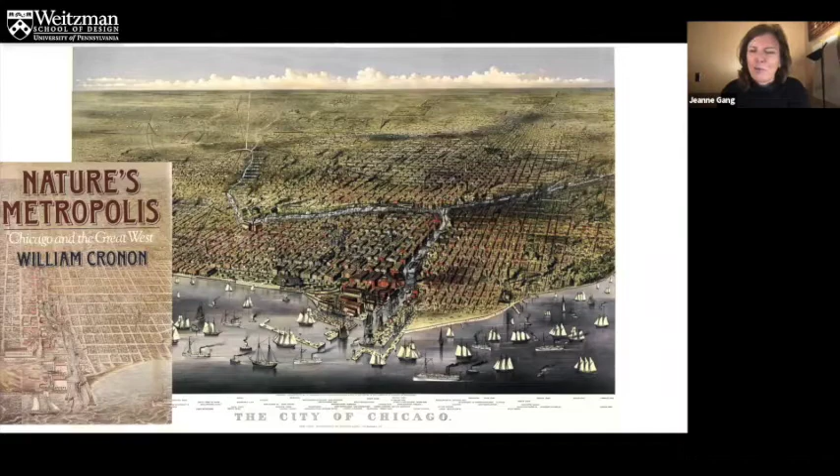When I look back, one of the most important books that I've ever read about cities in general, and it happened to be about my city, was Nature's Metropolis by William Cronon, because in this book he really talks about the environmental perspective on the history of 19th century America, and this story of the city and country that become more and more entwined and bound together in a system that reshapes the entire American landscape and the culture that we pretty much know today. So I highly recommend it. It's really one of the best books I've read on the city.

But the human dimension to this background of the work is that when I first started out as an architect, I happened to start with a number of projects that were all community centers in various neighborhoods in Chicago. These commissions were rather small, but I really got to know a lot of the people in these different neighborhoods. This is one in Chicago's Chinatown. The second one here is in the neighborhood of Auburn Gresham, on the south side of Chicago, and it's also a community center for foster kids.

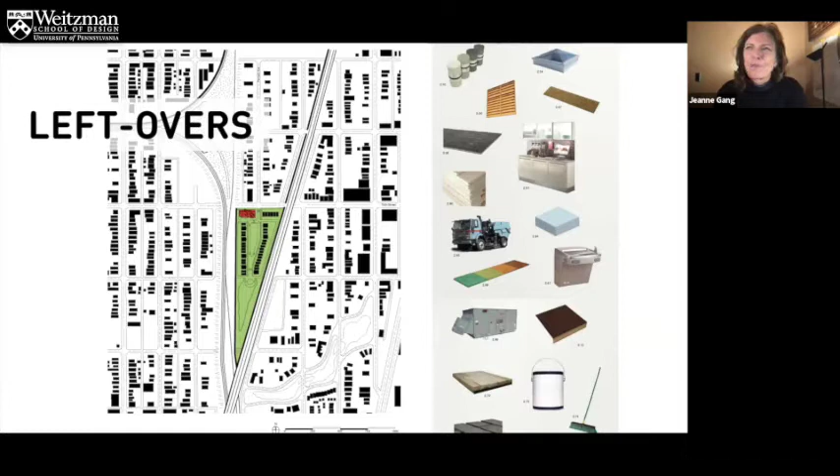And it's really where I learned my tactics, which is having a very small budget, which many young architects do, and trying to make use of things that were left over or donated. In this case, we had a piece of leftover land, that green triangle. The red rectangle is the building. But we were also told we need to gather donated materials and services even to create the building. And so working like that and using those constraints as inspiration, we created a community center with the leftover concrete that was literally donated from some of the big high rises going on in downtown Chicago, which were different mixes.

And so this idea emerged to create a building that was expressing the donations, highlighting the differences of the different mixes of concrete, and showing at the same time their fluid form, because the concrete, of course, is a fluid material. And so these inspired what we call the strata wall, which was the front of the building.

So one more community center that around the same time was on the far south side of Chicago, which is an environmental center focused on conservation of environment and also green job training. And this project ended up being a very influential project for our following work that came afterwards. But it really was based on the place and the qualities of the place.

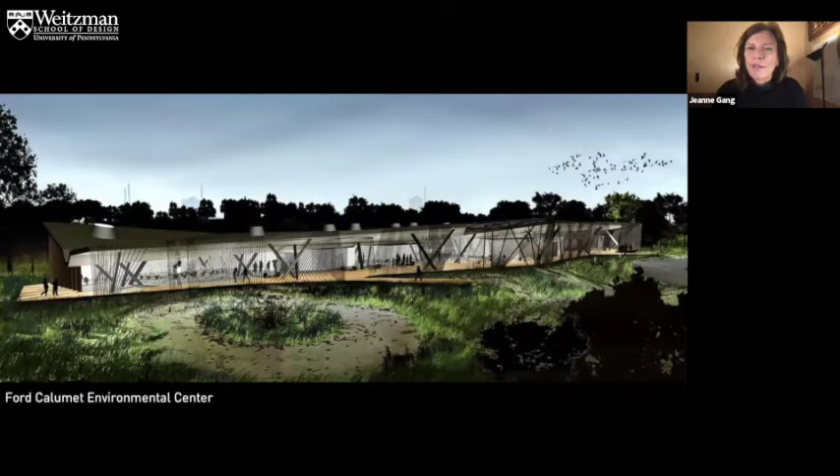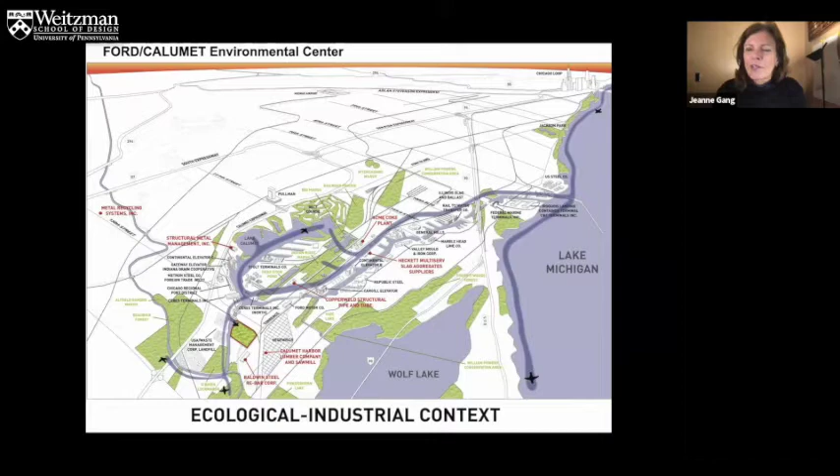So if you see in this diagram here, the red triangle in the lower left-hand part of the slide is the site. And you see this kind of patchwork of industrial areas and ecological areas, and then overlaid with this migratory flight path. And so all of these components that are both ecological, but also material opportunities came together to create a project that was really focused on reuse.

And so in our teams, we did an inventory of all the materials that were available, and came up with not just a form, but really a strategy, a process by which we could build a building made out of reused materials that were available and nearby. So the metaphor for this for us was a nest, not a nest to look like a nest, but a nest in terms of using what is available, what is nearby, and using the least amount of energy possible to create another community center.

So this first model of a diagram showing the uses of these different materials that were available in the area, and at the same time a discovery, which really is why I love architecture so much, is in the research mode, finding out that this migratory bird path is coming right through Chicago. Like 2 times a year, you have this incredible international migration of birds, it's an event that's visible to everyone.

And you can see this happening, but there's a big danger to it as well. Something like 1 billion birds every year die crashing into clear window glass that they cannot see. And so this is really decimating bird population and biodiversity. And it was something that we discovered through our research phase. We ended up working with an ornithologist to help us design a way to prevent that, especially, you know, we didn't want to kill birds that people are coming to see on this ecological project.

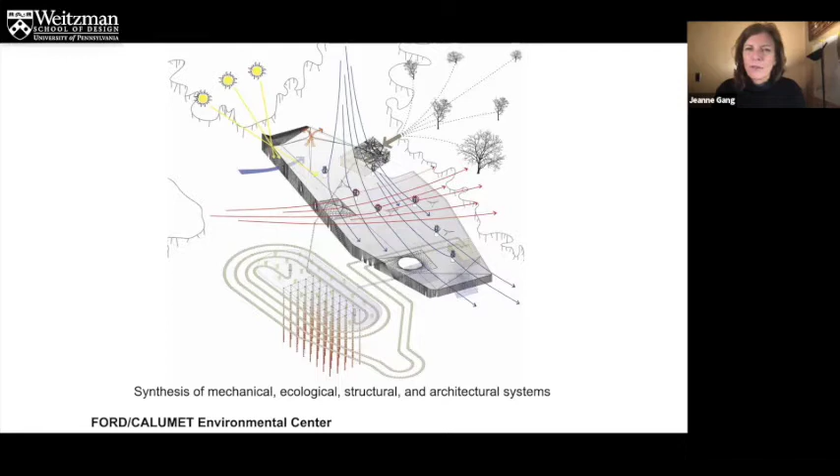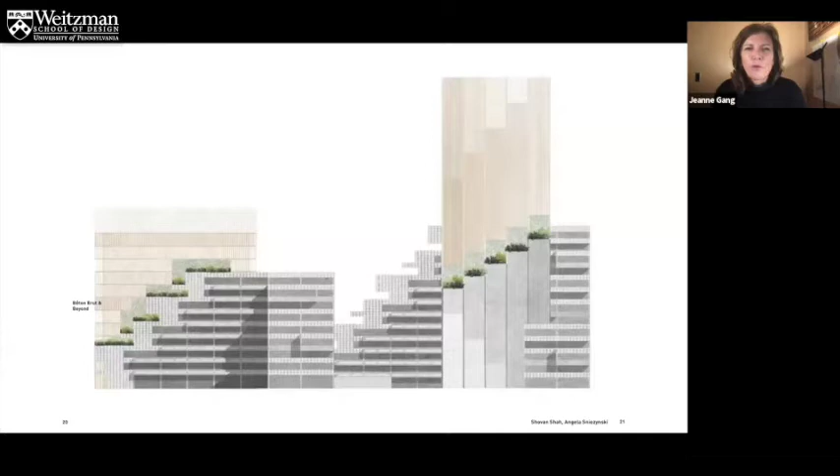Last spring, we did a project on this, the Daumier project in Paris, which was a former social housing, and students did things like adding on to it with wood structures, or reimagining the uses that could inhabit it and editing out parts of the building to make it last longer, to keep that embodied carbon within the building. Especially a concrete building, it would be a big waste to tear down. And anyway, this is the research that is going on for that type of building.

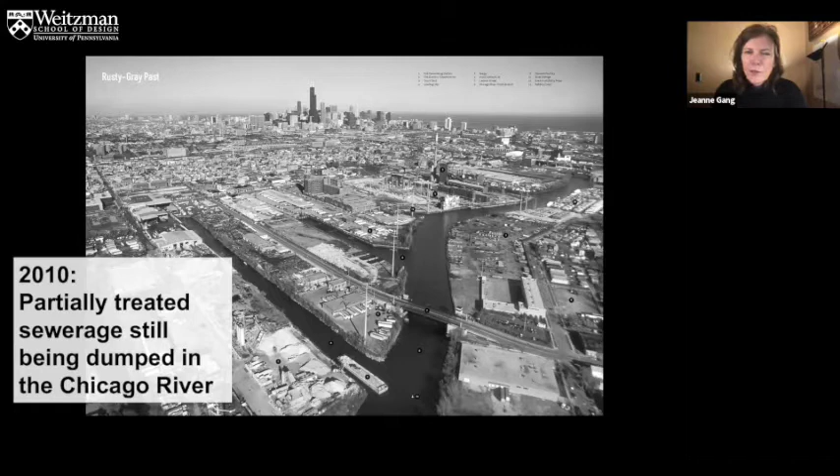So in 2010, it was still the case that partially treated sewage water, CSO, combined sewer overflow, was being dumped into the Chicago River. This view shows the south branch of the Chicago River with this incredible vacancy where industry had once dominated the edges. So very interesting in Chicago: a lot of people don't even know where the river is because there's no access to the river's edge because of all this industry, even though they oftentimes pass over it on their way to work, maybe two or three times in one day.

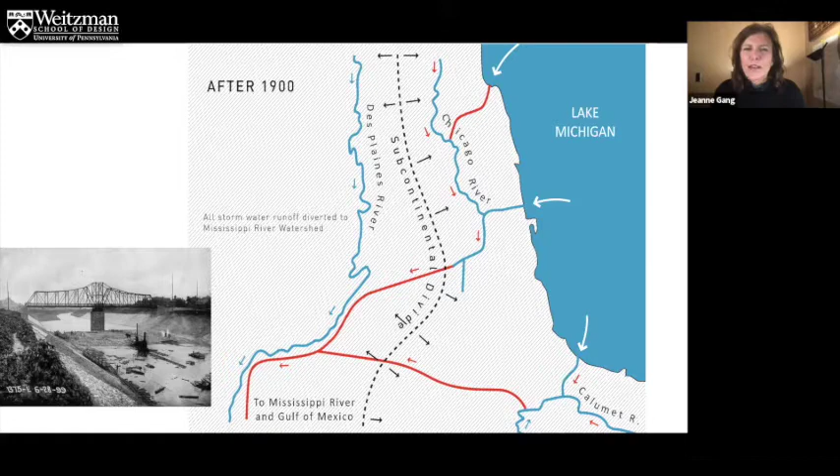What actually happened is that the Chicago River was reversed. These red lines on the diagram were canals built to take the flow, instead of going into the lake, which is the city's drinking water, and pull it away from the lake to save the drinking water. It was a massive infrastructural project. Hard to imagine getting something like that done today. It was great for the city of Chicago, but it wasn't so great for everyone else downstream where this polluted water was heading. And over time, the results were very negative on the environment, like flooded basements and bad water quality, as well as invasive species having an opportunity to get into the Great Lakes. But the opportunity of the vacated industry was a great one.

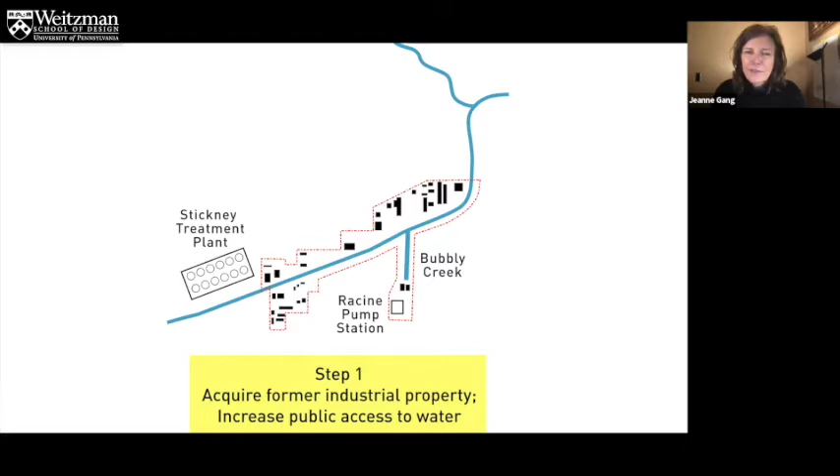So in our book, we made these recommendations, of course with the advice of science and experts, to visualize step by step what we might do to unreverse the river, to put it back into its original form and protect the drinking water, but also reduce energy use on infrastructure. But the number one step that we recommended was for the city to acquire this riverside property, and also to give people access to this water's edge, which they didn't have before.

And so after doing this project, which was just a book project, a new political administration came in and the mayor decided to really focus on the river. And this book had an impact. It really helped shift the idea of what the river is in Chicago to something that would give people access to it. Even if the river had bad water quality, the idea is to create stewards out of the public that then care about it and take that fight forward.

And then we ended up ourselves, and also a couple other architects, building boathouses for Chicago youth and communities to be access points to the Chicago River. So in terms of reuse, it's thinking about the city's use as an industrial mecca and transforming it into something that is more about public access. Many of these sites are quite polluted, and we must remediate and then build upon them. But what amazing results, in that now there are so many youth-oriented crews and different groups that are able to get on the water, and a whole cadre of people devoted to protecting it.

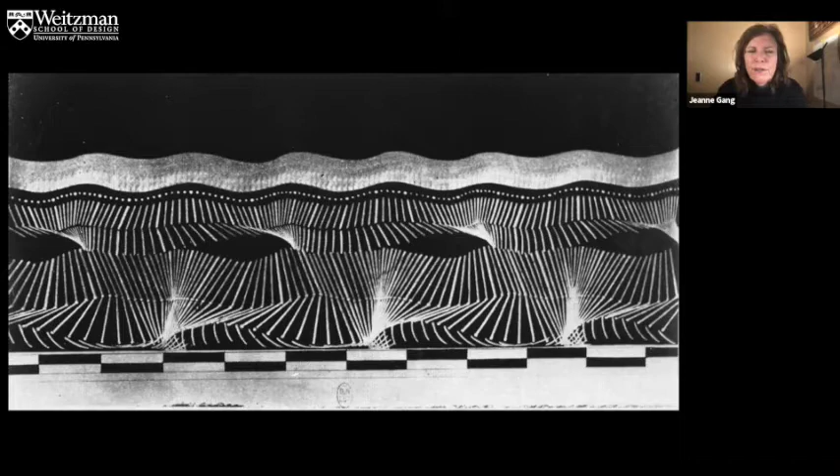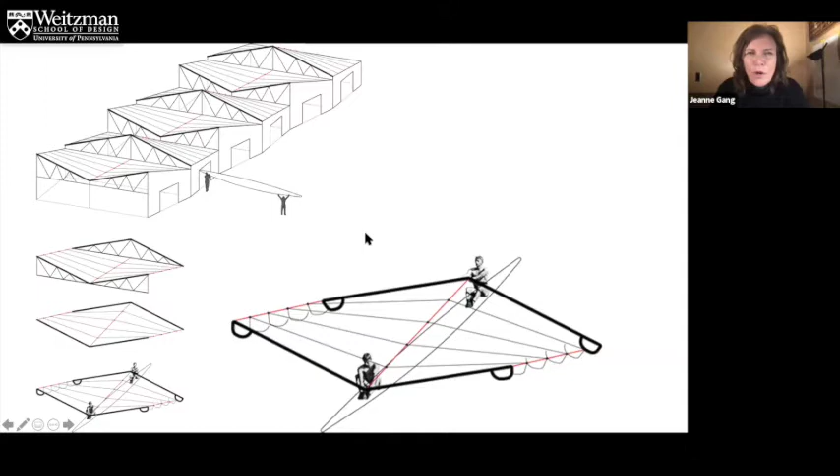the motion of rowing, how to capture motion into the building. So we looked a lot at these Muybridge stop-motion photographs and looked at the motion of the oars to kind of extract that into a roof form that would be dynamic and varied, just like the oars' motion, but also do something environmentally positive, like create clerestories that help warm the boathouse without using fossil fuels.

So that's how that looks, using the M and the kind of V-shaped oar positions. We created this almost like a warping roof and a field house. I think it was required to be masonry, but we were able to convince the city to use slate, which is masonry, kind of. And then really simple materials like plywood that's bendable. So again, it's this coming together of the materiality that exhibits its properties, the qualities of bendability.

And even in this one, you can see we had a very low cost plywood, and we ended up just with our team gold leafing these little knot holes that are in the plywood just to give it some special spark, because that knot hole is actually where the branch was coming out of the tree, so it's kind of like a special moment.

They do a lot of classes here, like these are disabled veterans that are learning to row, but it really is an incredible program to build community and resilience and teamwork for the youth in the city. There's a great film that just came out. I'm going to forget the name right now. I think I'll tell you at the end, but that talks about some ex-gang members who got into rowing, and some of the shots are filmed in the boathouses, but it's a great film just telling the story of what it did for them.

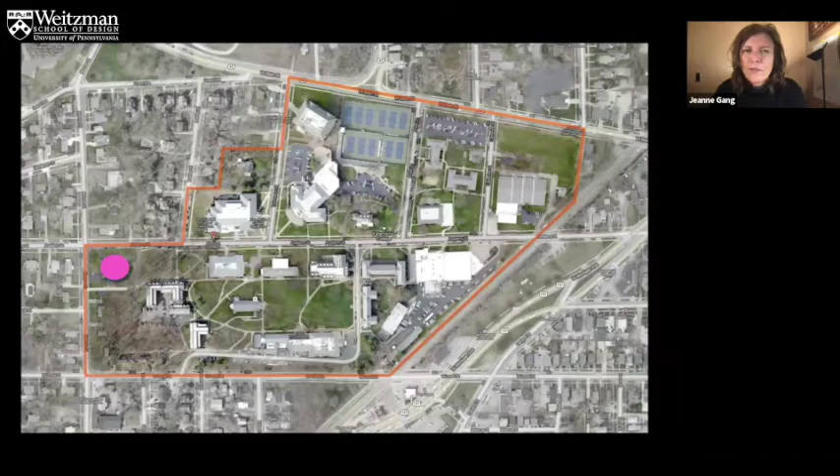So this is just a small building on the Kalamazoo campus in Kalamazoo, Michigan. And it's a center for kids to learn how to connect and be social justice leaders. And so the campus is very traditional in terms of its architecture, but this is a very untraditional and very radical new program; they wanted to express the desires of the program, but make a place that would be easy for people to meet and to connect, especially about difficult issues like social justice.

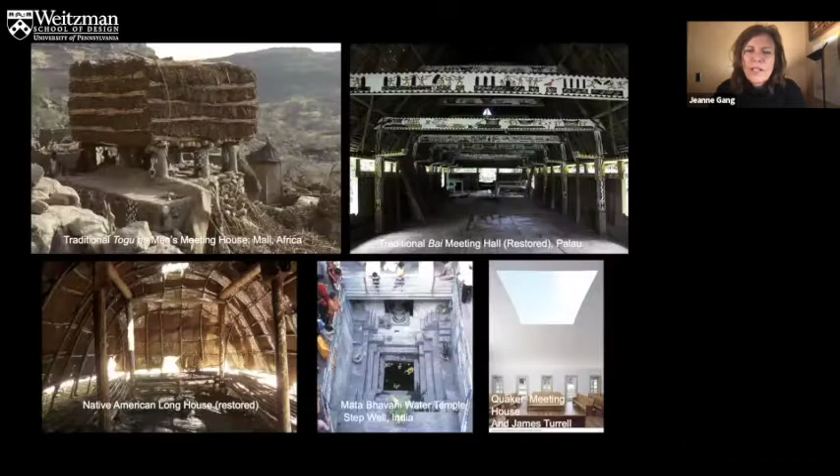It could be LGBTQ issues, it could be human rights issues, and it needed a safe place that allows people to let down their guard and talk straightforwardly to each other. There was really no precedent for this, so we really looked at community meeting houses and vernacular architecture, from Quaker meeting houses to Bai meeting houses. Just what did they have in common? This is really about facing other people in a space.

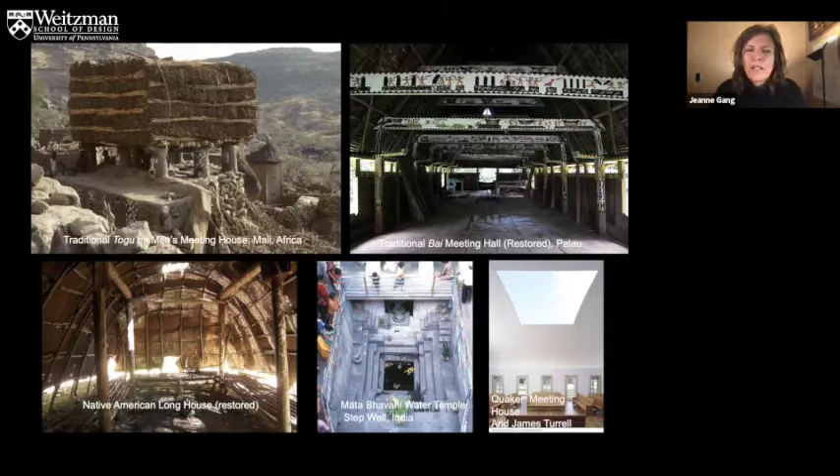The elements, water, fire, light are common. And those are the things that we tried to pick up on to create a kind of central space around a fireplace, which was not exactly easy to do in an academic building, but also food preparation was important to them. And those are all things that help people to come together. So it's really an academic building, but really for special projects, for faculty, for seminars like this room here, and lectures and conferences is one of the big things that they do.

And so we worked with this parti to connect the different parts of the campus, this grove, and then the residential neighborhood nearby, realizing that, to reduce carbon and to produce a very insulated building, we need a lot of wall.

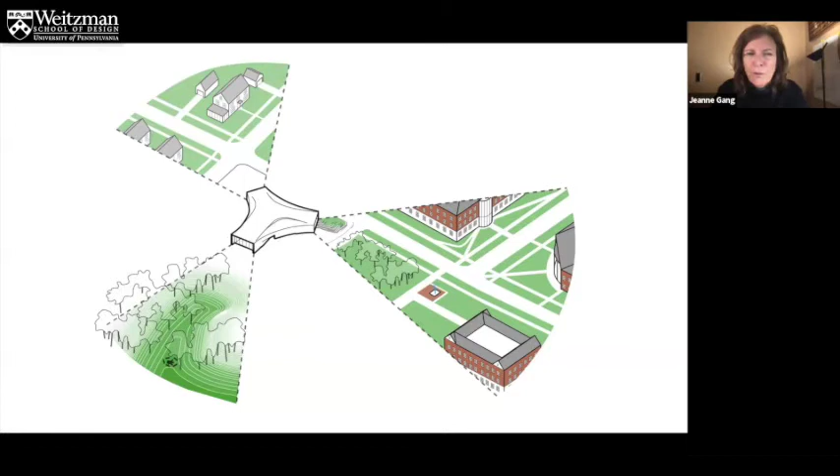And so we focused the window openings on these 3 points, and really focused in on a renewable material, which is the white cedar in the range in Michigan. And I think it was one of the trips up to Michigan where we stumbled upon this barn, which had this curious wall, and it was made out of wood, and wood stacked but on end. So this project really became like a quest to figure out how to do a wall like that in the 21st century.

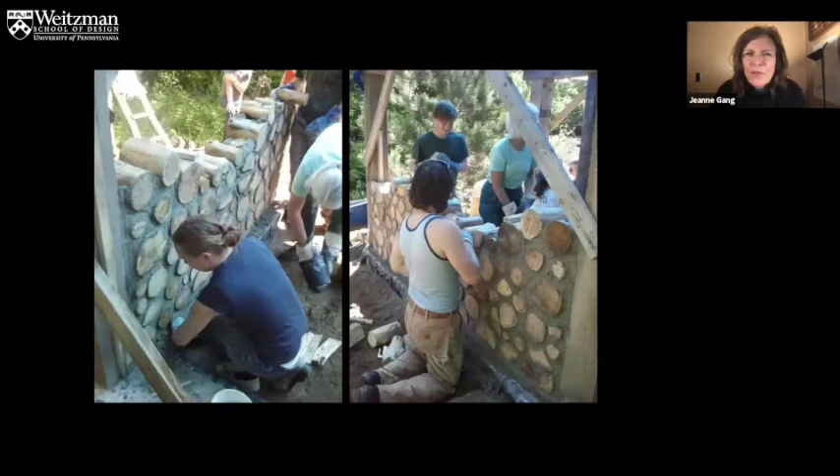And we found a couple of people, like this couple that were very into building like this. They had only built saunas and small projects. So we brought them to do a workshop with us. That's us and our contractors who are professional masons. And it really was a very easy wall to do.

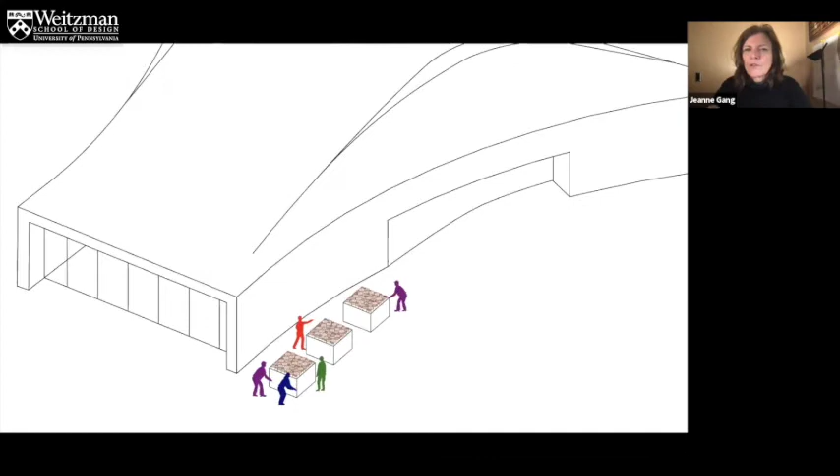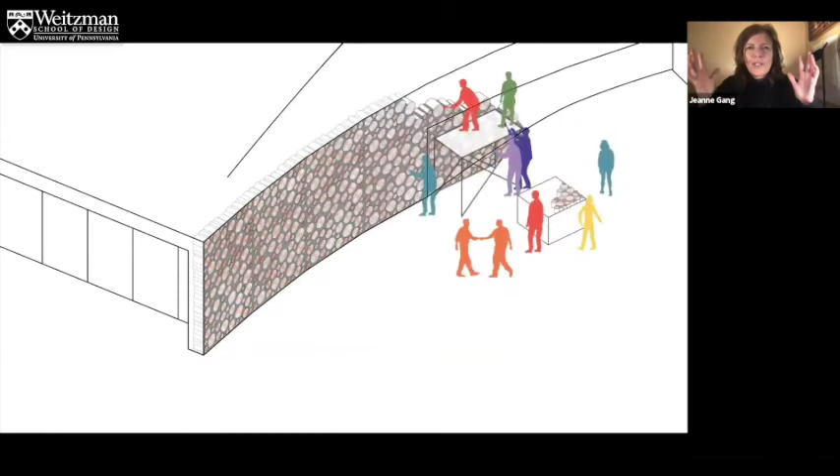But the thing about the use of the material is that, like I said before, it's very little manipulation of this material. So therefore, it's very low carbon, and trees are carbon. In fact, they are carbon. They take it out of the air and they produce wood. So this is a way to sequester that carbon from the atmosphere. So I think very big potential here, and producing aesthetically a beautiful wall that was not exactly easy to make look this refined, because it's a very brutal kind of rough technique.

But I was so happy with the way that it comes out, and it really weathers differently on the different exposures. And it's a long-lasting, beautiful technique to do. Each log is almost like someone's face, with their rings and their wrinkles. I felt like it really connected with the mission, and also was relevant in terms of environment. Here's the one wall that is the northern wall getting the most exposure, and one of the windows where we did an experiment with the eyebrow window there.

This project wasn't finished when we did the book, so I just wanted to highlight it because it's so interesting. It's a reuse of an old coal burning power plant here on the shores of the Rock River. And what's interesting here is you have up in the background a very old college called Beloit College in southern Wisconsin. And this is the power plant that served the town, the industrial town, and heated the college for years and years. And this power plant grew over the years, and it kept adding on and building capacity. And here you can see it with its smokestacks, and this is the 1930s addition to it.

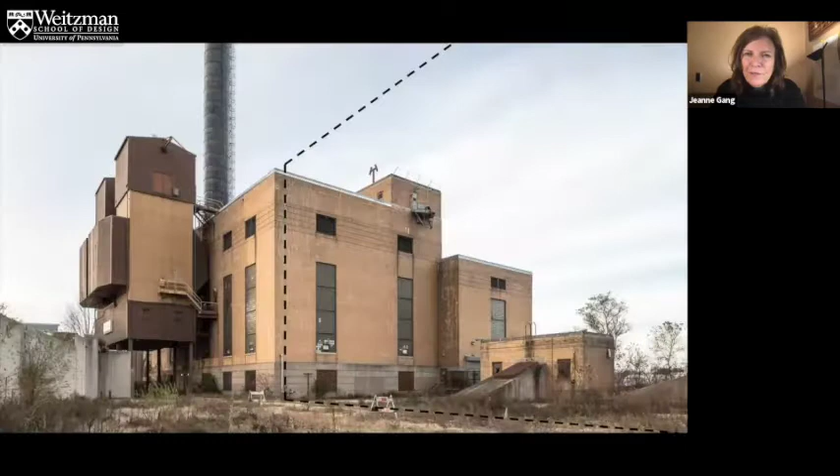This is what it looked like the first time that I toured it, which was about, I want to say, 10 below zero temperature. It was colder inside the building than outside the building. These are the scrubbers that were added in the 1970s to improve the air coming out of the top of the smokestack. But it's just a huge building.

We really researched the construction of it. And it turned out it was built a little bit at a time, many different additions. And so to meet the program of the college, we kept in the logic of that and added a field house, which is one of the functions that they needed, kind of in the same extension line as what the original building was doing, and then connected it with this pedestrian bridge because the college is up on the hill and it's a very busy road down below.

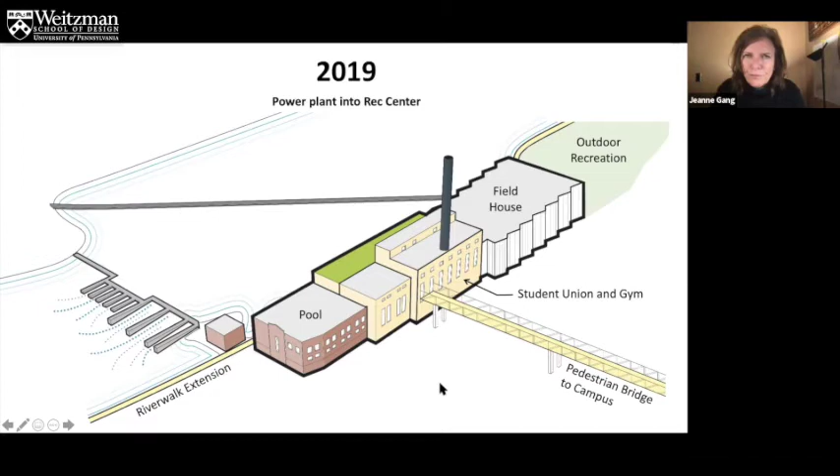And so what was really interesting about their idea is, maybe we could fit it as a college. Most of the time colleges go through this thing where they have to build a new student center, and then they have to build a health center, and then they have to build a recreation center. But if we could get all three of them into one building, it might be able to happen all at once and be more affordable. So that's what we did.

We put all three programs into this building, and you can see we kind of united those with the running track. So this is a student recreation center and health center and a student union or student center. And this big space here is where a lot of the teams practice inside, like baseball and field hockey and lacrosse.

There's also student recreation available, weightlifting, exercise classes in this running track, a pool for the swim team, and then a lot of the other functions going on the ground floor, and the kind of event spaces up at the top. And here's the bridge connecting over to the campus.

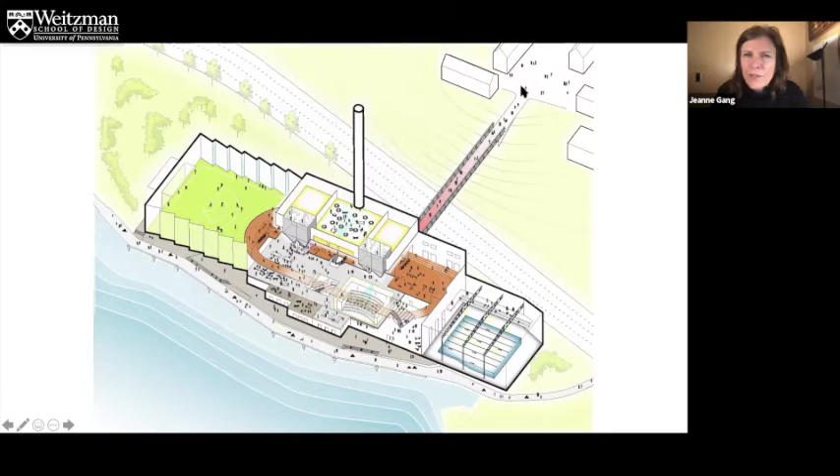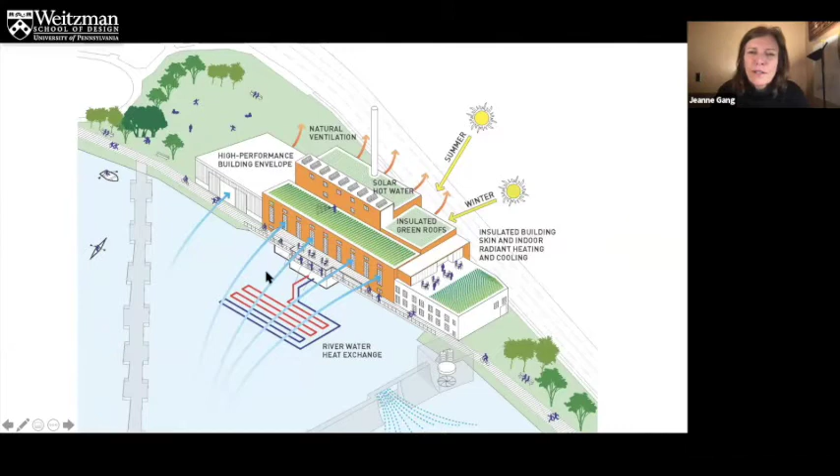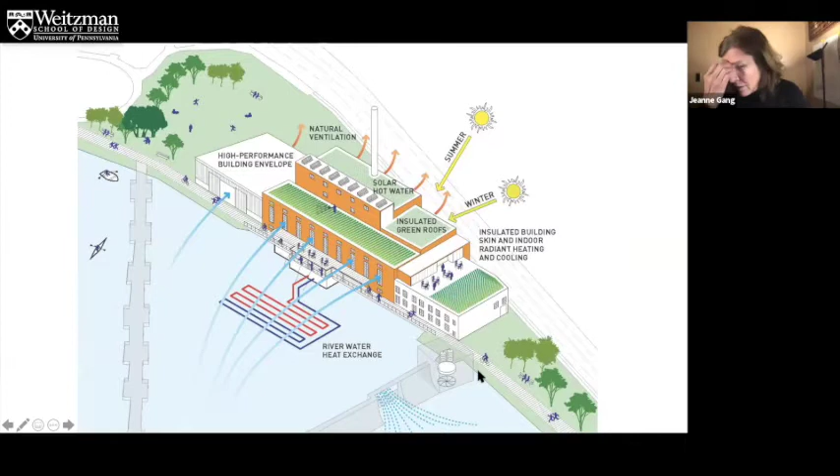And so it was really an interesting project in that you had this conflict between going for the best environmental solution and the historic building preservation. So there was always this battle between those two, and I could go on about that for a long time, but I won't. But we are using the river water for heat exchange and really utilizing the building overall. But we did go for the historic building credits to make this project happen. It looks something like this on the inside.

This is the turbine hall. These are coal hoppers where all the coal is coming down. I mean, it was in pretty bad shape in some parts. So a lot of things to discover in a building like this.

This is the final building, which just opened in the fall of 2020. So it was able to be used this last fall, and it came in really handy in terms of the pandemic, because it's the one building the college had where people could really spread out. And there's something about the scale of it that you just would not be able to repeat today. But this is the building from the Rock River view, in its final condition.

And I just have a couple other shots. I haven't really been able to organize these. I just recently got the photography, but it's interesting. The part which is the field house has so much fresh air exchange, it's really considered an outdoor space that's protected. So they're able to fully utilize that during the pandemic.

Here's the bridge going across to connect. And really the building is acting almost like a piece of infrastructure that connects people from the river, the river walk on the opposite side, through elevators. It's a machine that allows accessibility in the town. This is going across the bridge and inside the turbine hall and the running track held by the structure above. And these are some of the things that were kept.

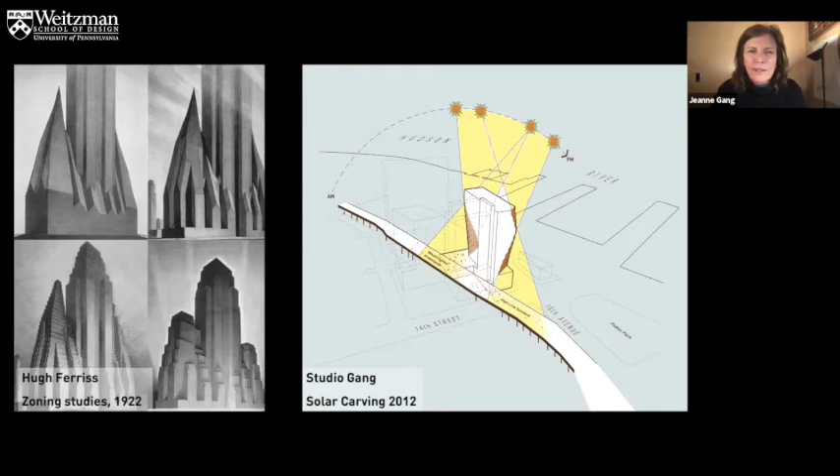But here we found that along the High Line, there's actually an interior block public space. It's not the streets; in this particular site, what you want to protect is this brand new, very popular public park. And so we argued with zoning to allow us to set back off the High Line, preserving light and views, and go higher against 10th Avenue, which is a very busy street, and it's right on the river.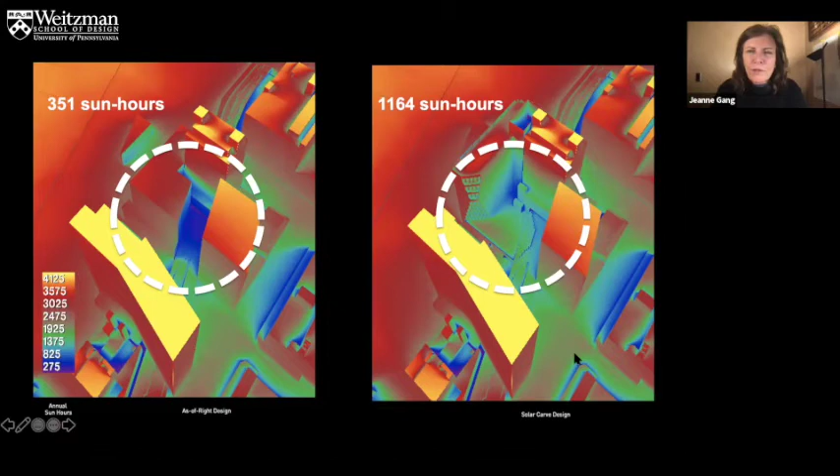And so by doing that, you can see this comparison that we did with our engineers, that with the as-of-right, we would have killed the High Line in this area, the dark blue, but instead with this process of carving for sun, we were able to preserve that daylight. These are some of the study models, how to treat the carved areas. And then figuring out how to produce that in an economical way, like a unitized system.

You can see here. But it really does work. When you're walking along the High Line, you do still get the views and the building. It's kind of being a good neighbor, getting out of the way in a certain way, but even using those constraints, it produced something really interesting and I think very beautiful. It's polite. It's a polite building.

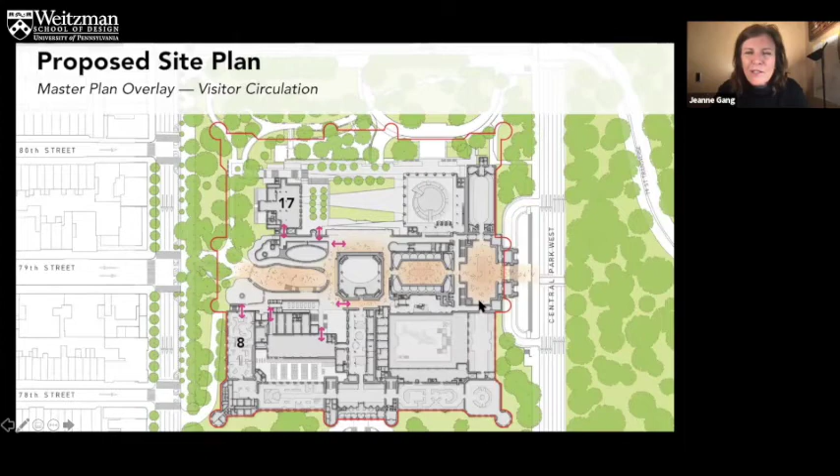And I think it will really clarify the circulation, but the feel of the building, we wanted to express a kind of excitement and sense of discovery, because science education in the United States is very bad. I think we're like 16th in the world or something like that. And it's important to get people excited about truth and science and facts. And so this project is really to encourage people to feel like they want to explore.

So it's really inspired by landscapes that do that, and really studying landscape and how it is shaped. It's very interesting how water, wind, and time can create this interesting flow. I mean, we know we have architecture that has done this in the past, like made you feel the sense of awe and exploration, but we wanted to try to do that toward science.

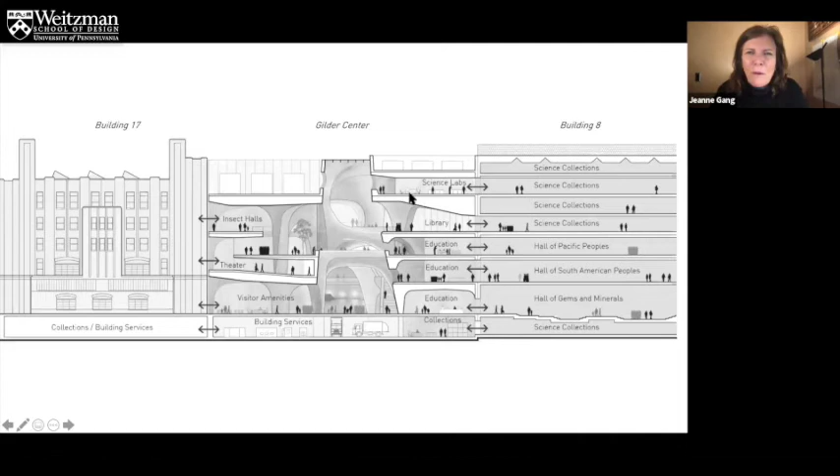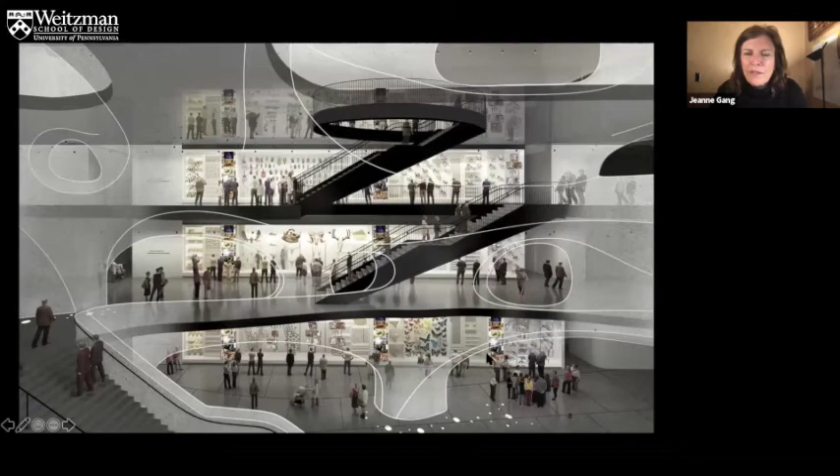So here you see all the different connections that were made between the existing and the new. There's also this kind of sense that the collection is alive. I mean, it's really being reused. They use this MRI machine to scan their collection. So it's still a place where science is going on, and trying to tap into that excitement as well. So one of the parts of this building is really showing the science that's currently going on in their massive collections. This is kind of an X-ray view through the walls.

So again, I just like making models, and so do the people I work with. And we thought it was so cold, we might as well use a block of ice to try to model, because a lot of the software was just looking very blobby and not exactly the qualities that you find in a natural landscape of erosion. And so we used this block of ice and melted it out here with a blowtorch.

Something I did when I was a kid was use hot water, heating it up on the stove with my mom, and then coming out and pouring it into the snow and creating spaces. So those are just fun things that I don't want to let go of, even though we have all the fancy tools. These are some of the models. And then we use this to produce our three-dimensional spaces.

And we got a consultant to help us write our own program so we could get these shapes. But what's interesting here is this is the structure. It's not an applied cladding. It's a concrete structure that is made with shotcrete onto a rebar frame. So this is really supporting the floors in the building. Here's some of the other views looking up into the atrium space.

And I'm really excited that this is under construction, but it's really using a lot of what was there. Again, I think that's why we kind of won the competition for this, was not putting a brand new building connected by a little link. It was integrating it into this existing fabric.

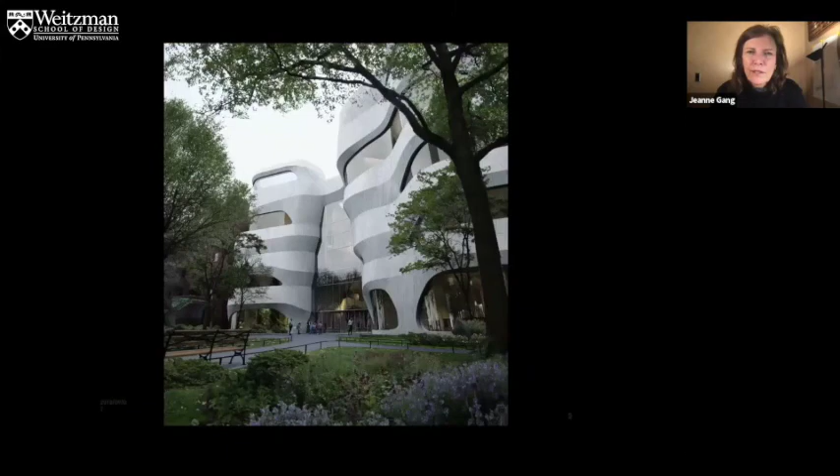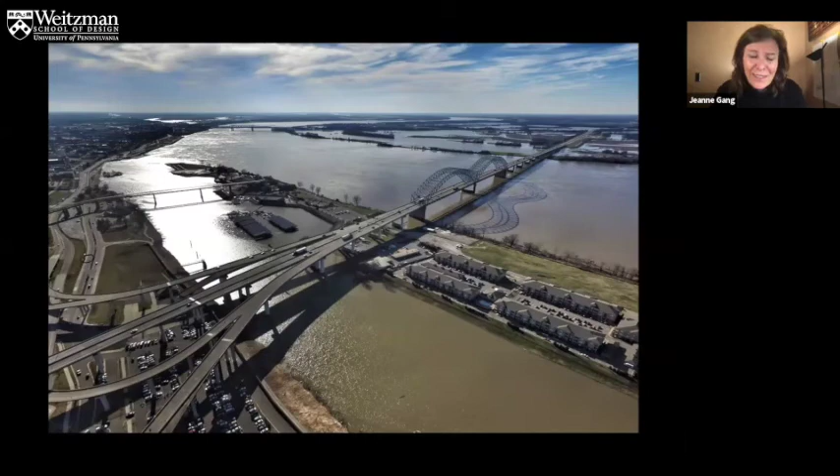Finally, just to show you more of an urban scale project, this master plan that we're working on for the Memphis Riverfront, which is a very complex project along the Mississippi River, a river that rises and falls about 50 feet. It changes that much in elevation, but it's a very wide, big river.

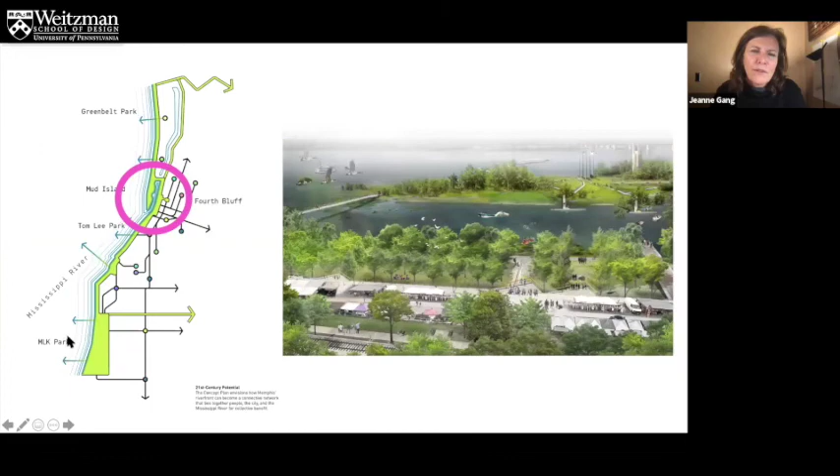And Memphis was a city, actually like Chicago was in the very beginning, that put its back against the river because that was kind of the loading dock. And this was the front street. So the city really wants to turn around and embrace the river. So our plan is all about connecting this diverse set of green spaces along the Mississippi River and connecting them back into the city as well.

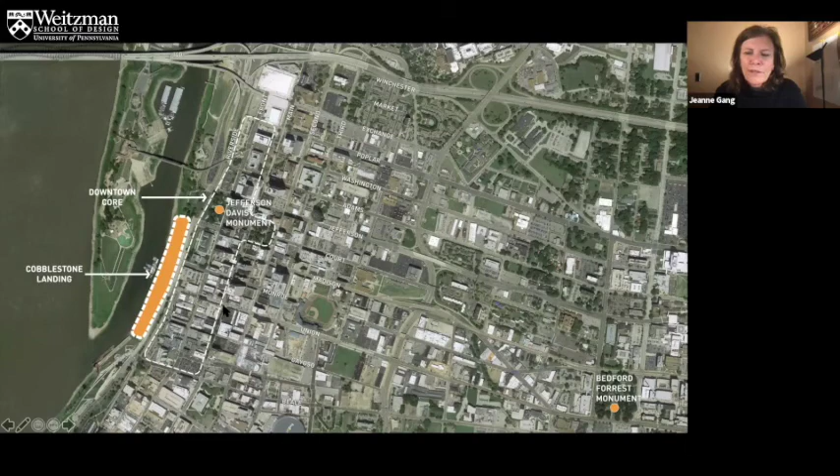Right around the same time, we started looking at the history of it, and we found that many different things happened on this landing, but it was like the loading dock. And so it was everything from boats docking there to the cotton trade, which means that it is implicated in the working of enslaved persons on this dock. Not that they were ever traded on this site, but people did work on this place.

And so they maybe had a negative opinion of this place. And then it's a history that's passed down orally. It was also a parking lot as well. It was everything. And so at this time, this very impressive woman, Tami Sawyer here in the middle, was starting a movement to take down these Confederate statues. So these are all events, political, intertwined with the planning events.

So we were looking at how we can move forward with these urban spaces that have all of this baggage and a past that makes people feel different ways. So our very important engagement process with people continued. And we were just asking ourselves the question of how can communities remake public space with complex history? So, we're not going to throw this space away, but what can we do to reimagine it?

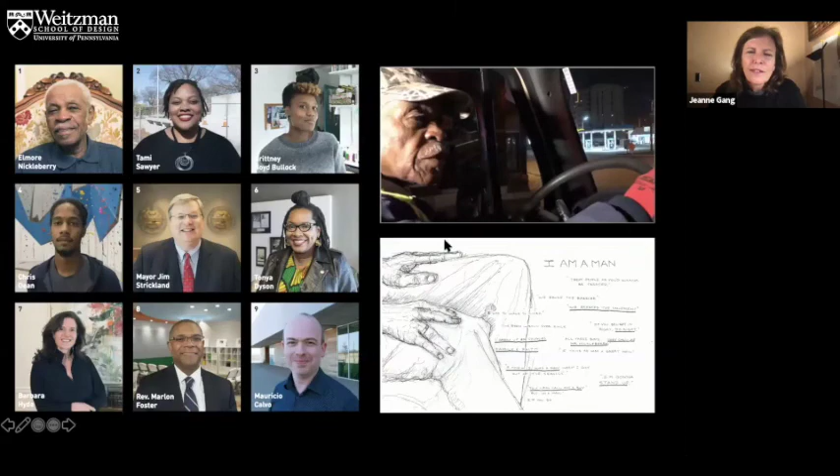So we started this story project by interviewing current residents and just listening to the stories and recording them. So that's us filming and drawing sketches, and that's Tami telling a story, of just ordinary Memphians and also community leaders, and through this story project we met amazing people, like Elmore Nickleberry here.

He's in his 80s and he still works in the city of Memphis and he loves the city, but he also marched with Dr. Martin Luther King at the I Am a Man March. And that was really pivotal for him. And he explained his experience. So what we were trying to do is get all these experiences of different people and try to translate them into the cobblestones, like infuse them into the cobblestones.

And so here you can see different techniques that we're using. Memphis gave us some of these cobblestones to work with, and we started to put these impressions into them. This is one that had layers. This is a project that we ended up showing in the Venice Biennale,

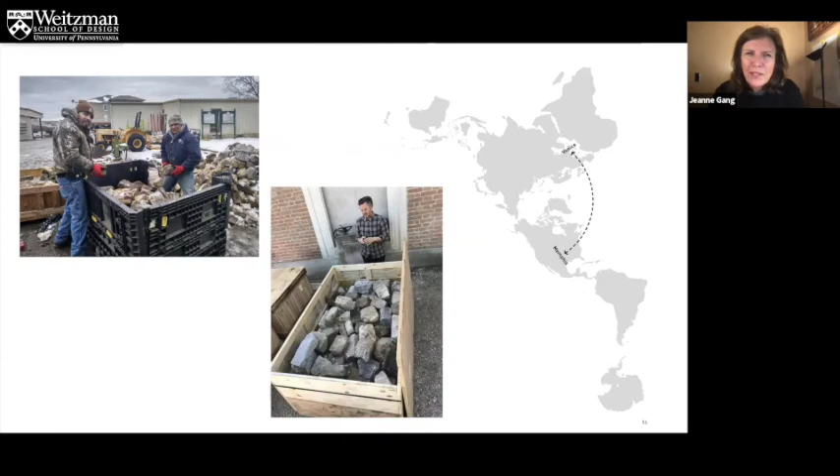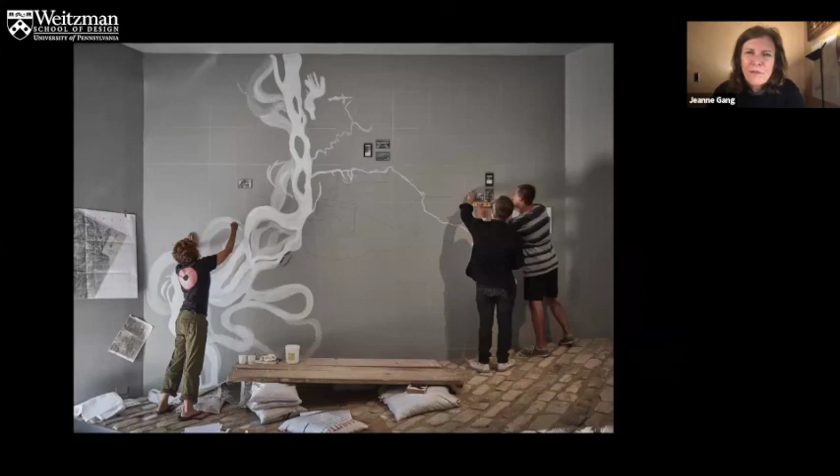and we brought the cobblestones all the way to Venice to give them almost like a voyage and to create a new history. So a certain sampling of them got put on a ship and sent over and installed by Italian masons in a new home for the duration of the Biennale. And there we also told the stories of the Memphians and their impressions of the city. So that's it really.

This is our headquarters in Chicago. It's also a reused building, 1937, the Polish National Alliance. It was a kind of a bank, if you will, or a credit union that we've transformed, and we're working right now on an experiment with the roof. We installed this green roof, but it's not just a green roof garden. It is really a biodiverse garden.

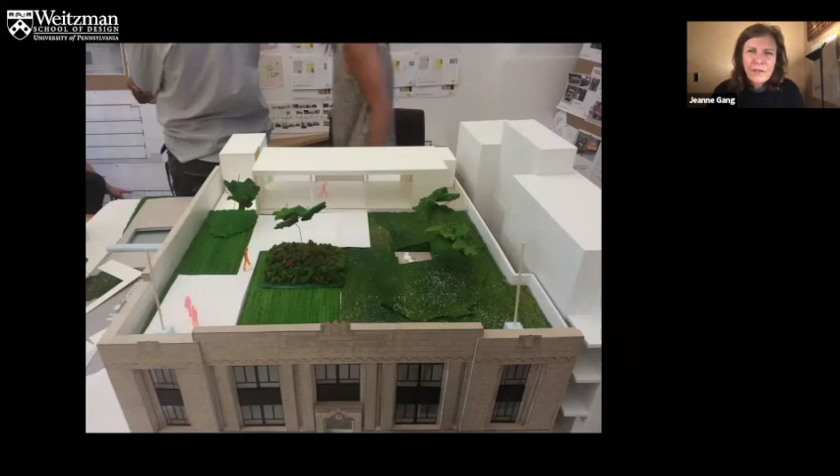And we've been tracking this. This is another one of these projects where I guess the client is us, but we're tracking the biodiversity of our plant species here. And it's also a place for us to come together. So it's really about connecting people to each other and to the environment. Every year we're doing this BioBlitz. So we have a number of BioBlitzes.

We take 24 hours and collect all the different species you can, plants and insects, and count the bats and animals. We also have bees up there to help pollinate it. And we have 3 different species of bats that we've found. This is a microphone here where we work with researchers to study the bats, so it's becoming this incredible wild area.

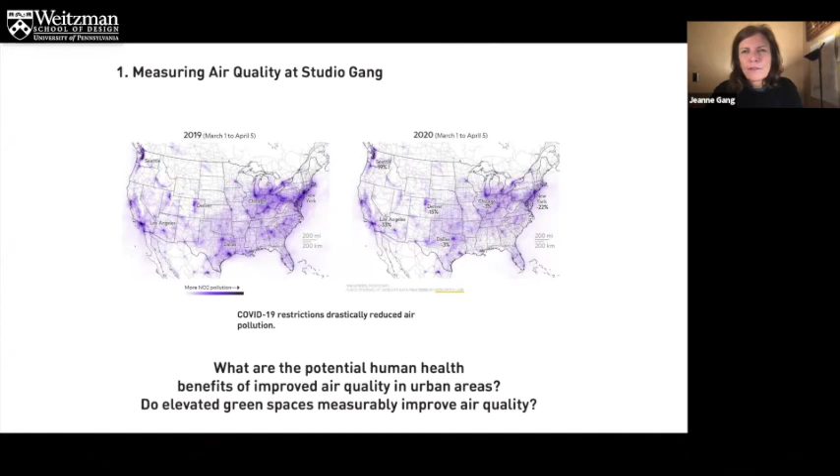And so now our next step is really starting to look at air quality up there. It's to measure what the effect of a green roof such as this, not a typical green roof, is on air quality. And so it's really a fun experience and experiment with scientists.

And we're also using it to help our neighbors install green roofs. So the goal of it is really to expand it into this green roof network, and to show what the benefits are over time. So thank you very much.